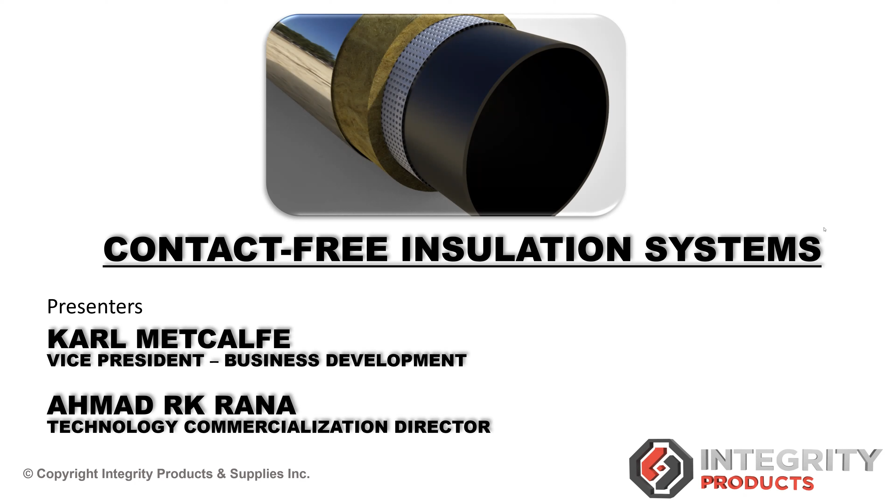We'll just do some quick introductions. My name is Karl Metcalfe. I'm VP of Business Development here at Integrity Products. I've been with Integrity Products for almost 4 years now. Degree qualified in business procurement and supply management, and I have over 18 years experience in the construction sector and the oil and gas industry. Joining me here today is my colleague Ahmad.

Ahmad, would you like to do a quick introduction? Yeah, thanks. It's almost 1 year. Speaking in terms of my education, I have a master's degree in materials and corrosion engineering. And while talking about my experience, I have almost 10 years of experience dealing with corrosion, whether in terms of my capacity as a field inspector, asset integrity, as well as R&D professional.

Thanks for that, Ahmad. So just for today's agenda, we're going to have a quick overview of corrosion under insulation and stress corrosion cracking. We want to talk about our approach to product development, of course, non-contact insulation systems, which is one of our newer products that we have developed. In relation to that, we're going to be talking about the ASTM G189 testing, which we have completed, and some of the results which we have seen. We'll do a quick overview then of our product range. We'll move then to a quick summary of our presentation here today, and then we'll leave the floor open for any questions. So any questions that you may have, you can feel free to ask them towards the end.

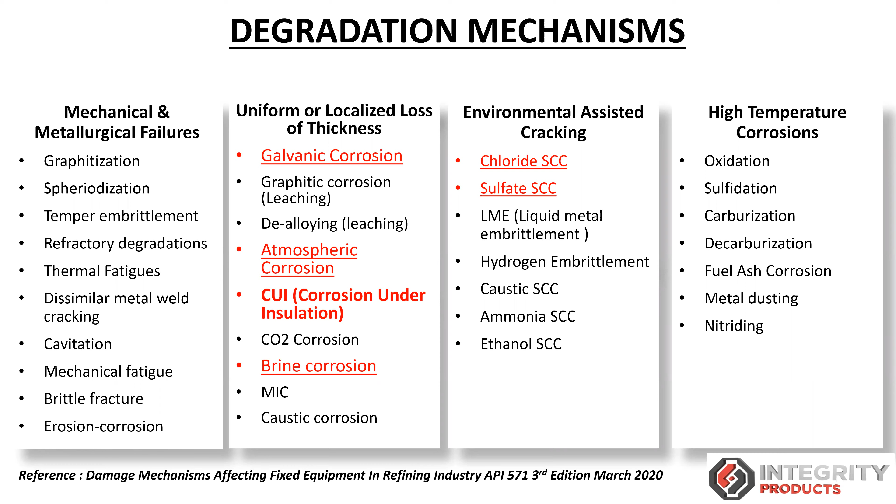And it is quite interrelated to chloride stress corrosion cracking and sulfate stress corrosion cracking. So even looking at the definition, the latest definition suggested by the API standard says external corrosion and external chloride stress corrosion cracking. Basically, both of these things, external corrosion and chloride stress corrosion cracking, are being addressed under the umbrella of CUI itself. So even though chloride stress corrosion cracking is a separate degradation, because of the failure mode of CUI, it's being included under CUI.

Speaking about CUI, it was reported as early as the 1950s, but the recommendations to address this issue came in the mid-80s and the late 90s. In the late 90s, we had the NACE SP 198 document. It was issued back in 1998, but the main focus of this document was about the coatings, protective coatings, for CUI mitigation.

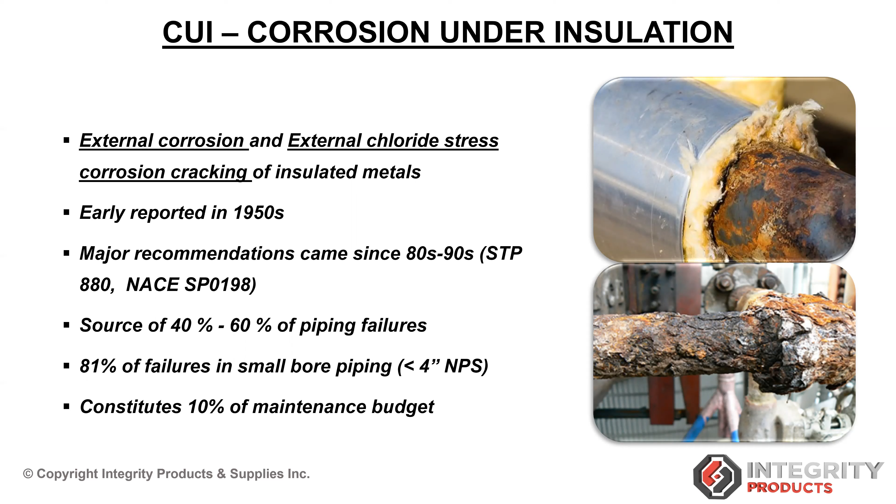When we talk about the impact of CUI, it's a widely accepted and published fact that 40 to 60% of piping failures overall are because of CUI. And if we try to narrow it down and quantify that in terms of pipe size, this impact is much higher for small size piping. With piping of 4 inches and less, 81% of the failure is because of CUI. Another case study, published by ExxonMobil, I believe in Corrosion 2003 show in San Diego, California, revealed that 10% of the maintenance budget of any hydrocarbon industry is spent dealing with CUI-related damages.

So here, as I just talked previously about the stress corrosion cracking, so it could be sulfate stress corrosion cracking or the chloride stress corrosion cracking. So again, the concept is the same, both are external to the surface of the pipe.

So as we can see in the snapshot on the left side, there are cracks, interconnected cracks, and they are originating from the points of highly corroded zones. So we can see in the snapshot.

And if we try to analyze those cracks using the microscope, we can see on the right side in the micrograph, it's a low magnification micrograph showing that these cracks are happening at the grain boundaries. So grain boundary is the location where the corrosion happens, and the same location the crack is happening. So it's a stress corrosion cracking mechanism, as I just mentioned.

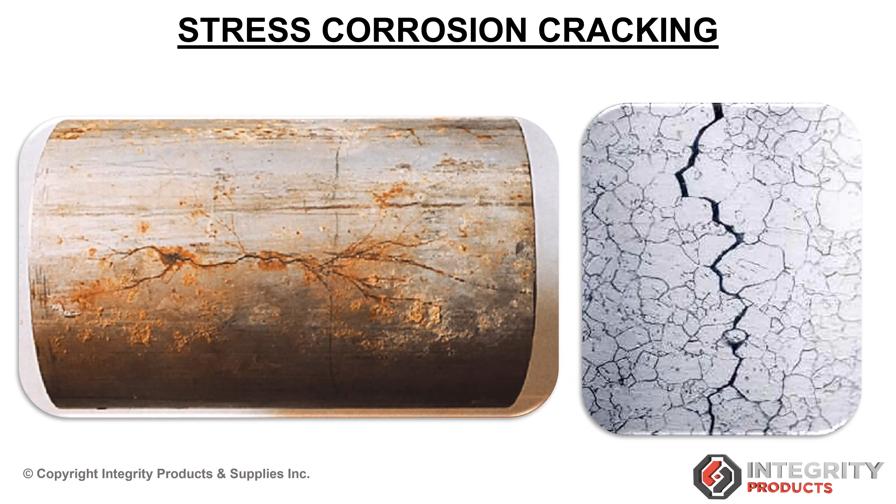So speaking about the CUI, it's a widely accepted fact that CUI is a prevalent degradation across the industry. But still there is uncertainty. It's still a gray area when we try to quantify the impact, the probability, or the consequence of CUI.

So even the modern recommended practice for the semi-quantitative analysis of CUI that is most widely used takes into consideration the design factors for calculation of CUI. So those design factors could be even the material composition itself, the base corrosion rate of the material, and also it takes into consideration the geometrical factors, the interface of piping and the pressure vessel or the storage tank itself, or it could take into various complexity factors.

And also it takes into consideration the insulation factors. That could be the type of insulation, whether we are using calcium silicate, mineral wool insulation, or foam glass, and the impact of the type, as well as the age or the condition of insulation, and also the surroundings that have a decisive impact towards CUI.

So when we speak about the surroundings, it's an external environment, and also the neighborhood factors. External environment could be the proximity to the marine location, or it could be cooling tower drifts itself, or the water spillage from leaking lines, or from any neighborhood maintenance activity like hydrojetting or hydroblasting activities. So these are all the factors that actually contribute to the CUI probability.

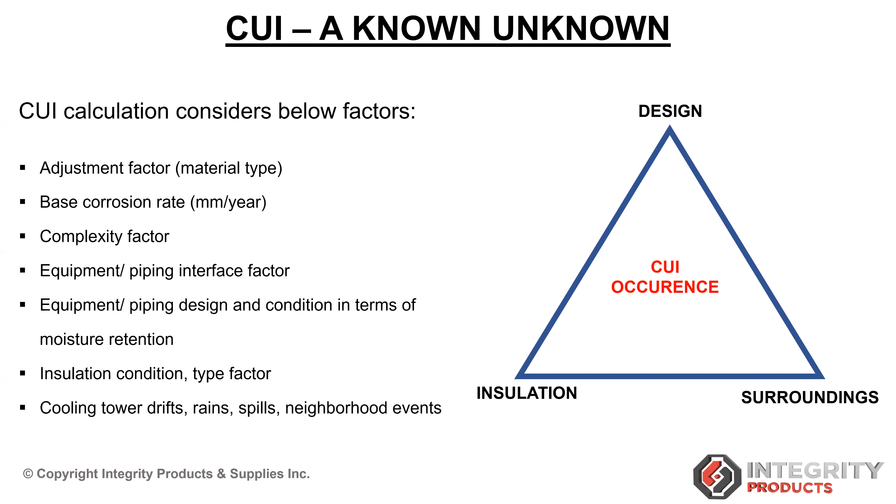Just to talk about our approach towards our product development, I think it starts either by seeing firsthand problems that our clients are experiencing in the field, or a lot of time it's from just making ourselves familiar with some of the published research that's out there, and also kind of the standards that have been displayed across the industry. So from there we look to design and start to prototype product ideas.

We have capabilities of doing our own in-house technical drawings, and we've got 3D printers. So from that we can very easily visualize and get our first product prototype in our hands. Usually from there we're looking at doing our own in-house shop testing. But at the earliest stage, we're looking to actually push that out to larger scale field trials.

Then once we compile that information and we see how the product has done in a field installed condition for a number of months or whatever it may be, we look to do final validation on the product, any sort of refinements we wish to make. And we then usually try to push towards doing some third-party independent testing. And then we approach our goal of having a finished, ready for market product.

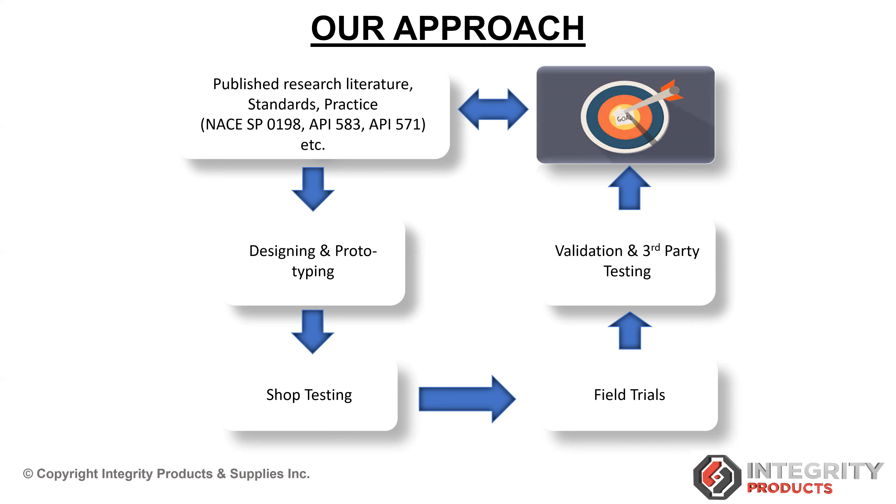Our mindset towards approaching the CUI problem has been that there's no one silver bullet which is going to solve the problem, but it absolutely starts at the design stage. If the designers are considering CUI and other degradations right from the design stage, then they will build better systems.

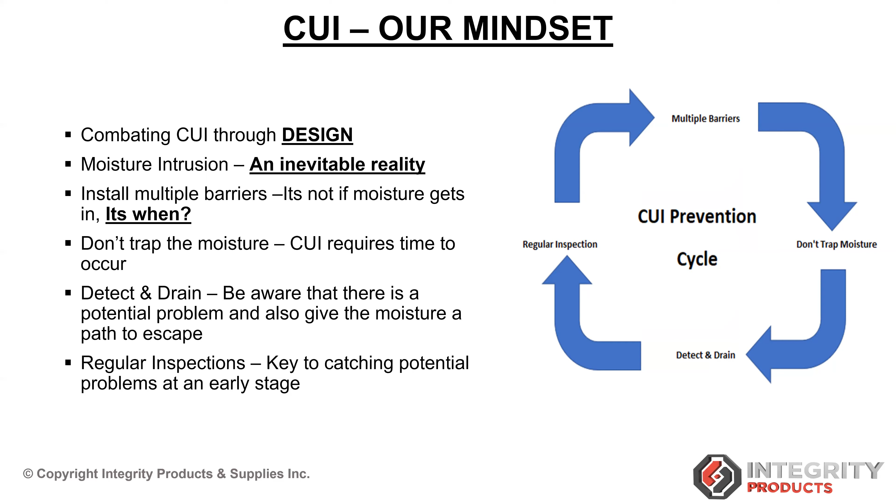But we believe it's very much so kind of multiple barriers, with pipe coatings, good insulation selection, auxiliary products as they're required, and then of course not to trap the moisture, to be able to detect and drain it. And then of course regular inspections are key for catching any potential problems at an early stage.

Thanks, Karl, for that info. So speaking about the contact-free system, that is actually the theme of this presentation.

Looking at the API standard and NACE SP198, they are in consensus about contact-free systems. API 583 suggests that contact-free insulation systems prevent water accumulation and chloride build-up on the steel surface. So basically, even if the insulation is soaked or saturated with moisture, we should have a provision that keeps it away from the pipe itself.

NACE SP198 actually cracks a myth by declaring that the cause of CUI is not the insulation, rather it's aerated moisture, or water containing CO2, oxygen, and other dissolved gases. So by having a contact-free system that keeps the aerated moisture away from the pipe, that would be an effective mitigation for CUI.

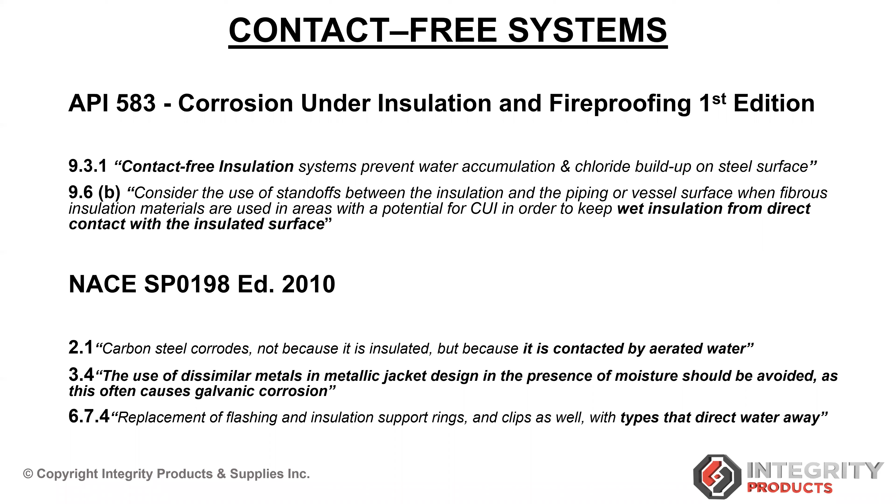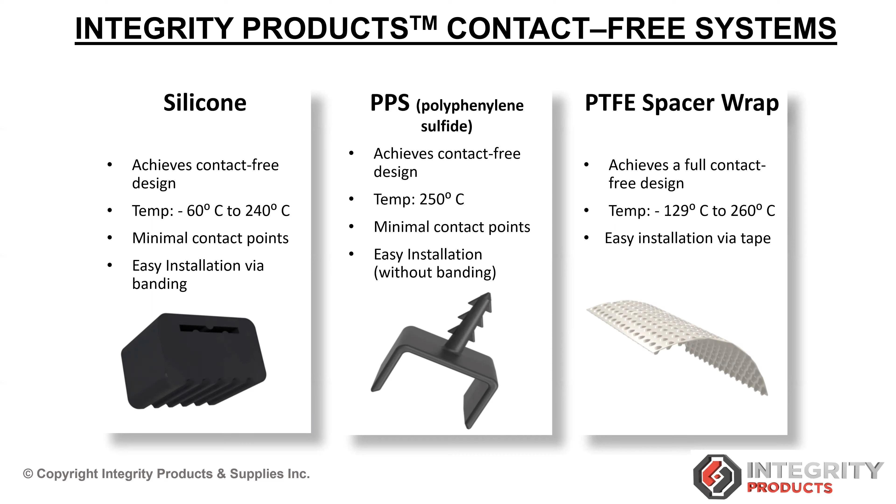Leading from there, we've developed a few different systems for creating a contact-free insulation system. We have our silicone blocks, which are installed via banding - they strap directly to the pipe, and the insulation is oversized and placed over them. We also have our PPS spacers, which simply stab into the insulation for a very easy install - stab directly into the insulation, then place it over the pipe. They work very well. Our latest product is the PTFE spacer wrap, a full wrap installed directly onto the pipe before insulation is installed.

Here are a few images showing how that's done. In the top left, you can see our silicone blocks have a slot built through them, so you can easily install them with a band, and the insulation can go straight over top. The polyphenylene sulfide spacers have that spike on them, which lets you stab it directly into the insulation, and then the insulation is placed onto the pipe. With both of these, we've tried to minimize the actual contact points between the device and the pipe itself.

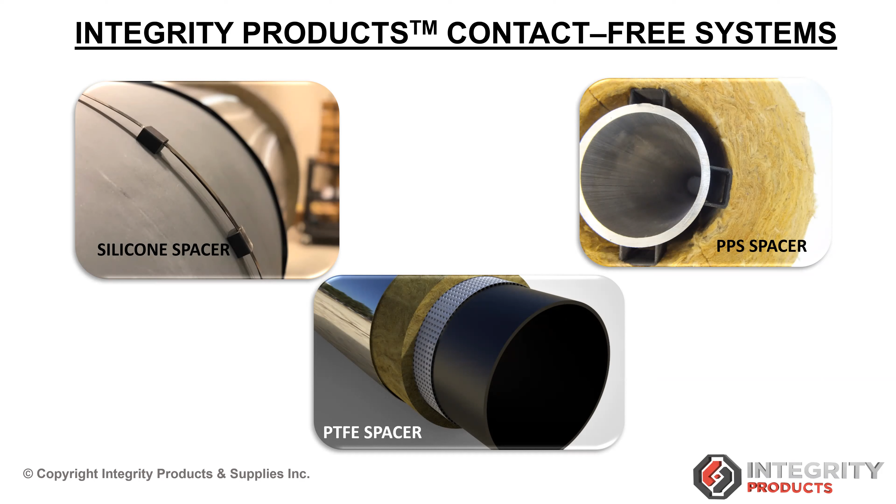Our PTFE spacer wrap is a fully encompassing wrap, placed on the pipe prior to insulation being installed. It's installed with the dimple side down, creating a 6 millimeter gap between the pipe surface and the insulation. We recommend the longitudinal joint just be a butt joint - there's no need for an overlap at the 6 o'clock position. For a circumferential joint, we recommend a 2-inch or 2 dimple overlap.

We also recommend the use of non-metallic strapping or tape to install it - our recommendation is 3M 69 tape, which is a high temperature tape. Here's a nice visual showing it clearly: we've got the PTFE spacer wrap placed directly onto the pipe, then the insulation going over top of it, and finally the metal cladding on the outside.

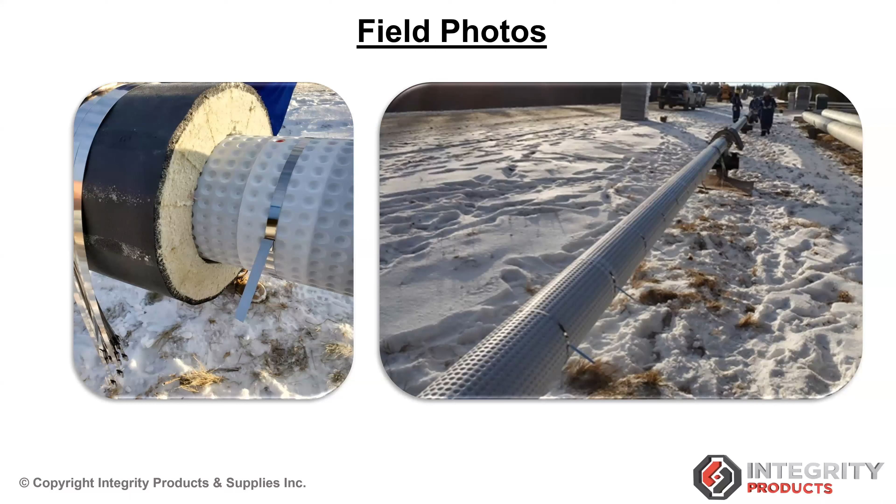Just a couple of field photos from a recent project we're working on. In this scenario, the contractor used metal strapping, but that's not something we recommend, due to the potential to poke a hole in the PTFE spacer wrap itself. You can see it's placed on the pipe, overlapped, and the insulation is then placed over top of it. We were very happy to get this product onto our first project and get some nice field shots of it being installed.

Thanks, Carl. I'd like to share some findings from our testing project recently completed in collaboration with National Research Council Canada. The aim of this testing was to check the CUI performance of different types of insulation and different configurations of insulation systems in conjunction with spacers and low point drains. All testing was conducted per ASTM G189 standard by a third competent party.

And here is the experimental setup showing the arrangement. For this testing, we used carbon steel. Uncoated carbon steel was used as a test coupon. On this end, it was covered with insulation and jacketing. And on the top side, we can see there is a funnel meant to introduce the electrolyte into the cell.

On the right side, we can see an immersion heater. The aim is to increase the temperature of the cell up to 100 degrees Celsius. The reason we are using 100 degrees Celsius is that it's the most favorable range for CUI.

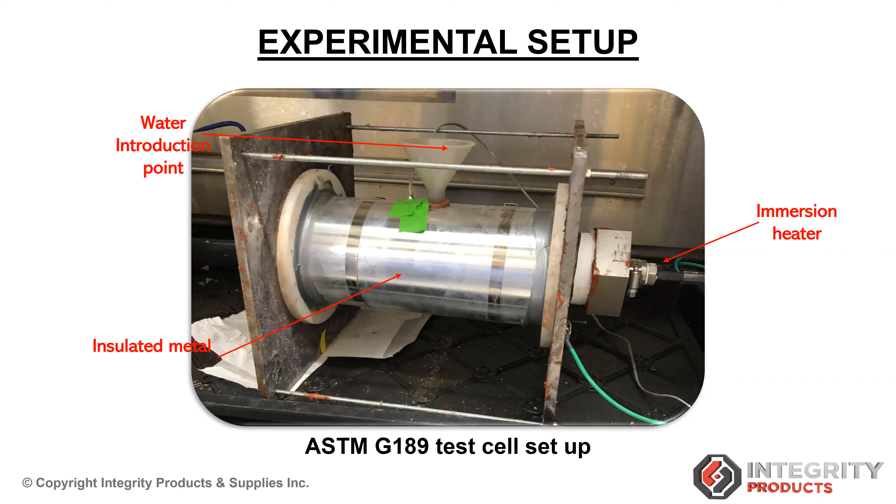So for the first phase, this project was actually divided into two phases. As part of the first phase, we checked mineral wool insulation as well as hydrophobic blankets in terms of CUI performance. That was phase one, and we also tried to check the performance of mineral wool insulation in the presence of the PTFE spacer wrap.

Speaking in terms of experimental results, these are the snapshots of the corroded coupon samples. On the left side, we can see the original sample before the corrosion test started, containing a grit 600 finish. The next sample was held directly in contact with the mineral wool. The third one was directly in contact with the hydrophobic blanket.

And the last one was wrapped with mineral wool insulation, but the contact-free system was achieved using the PTFE spacer wrap. Something to observe is that in the last sample on the right side, there is no corrosion at all on the surface. Rather, there is a change of color because of high temperature oxidation on the surface of the metal. So there was no pitting or general corrosion in the presence of the PTFE wrap.

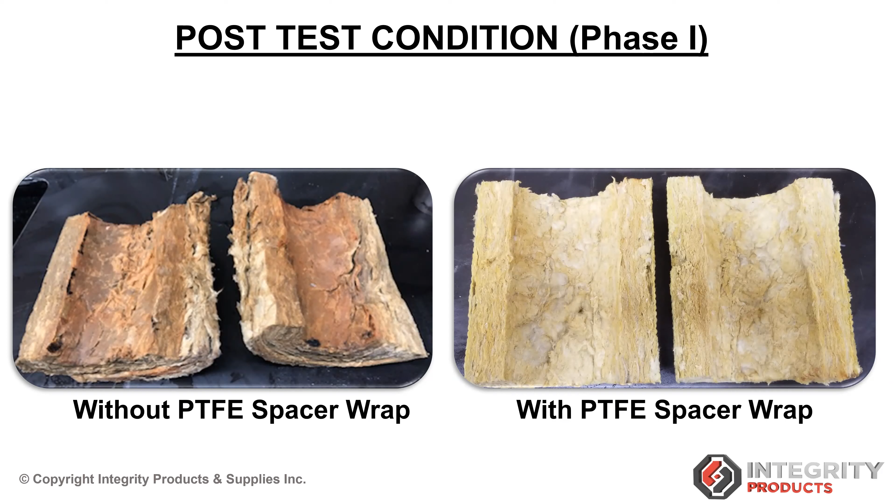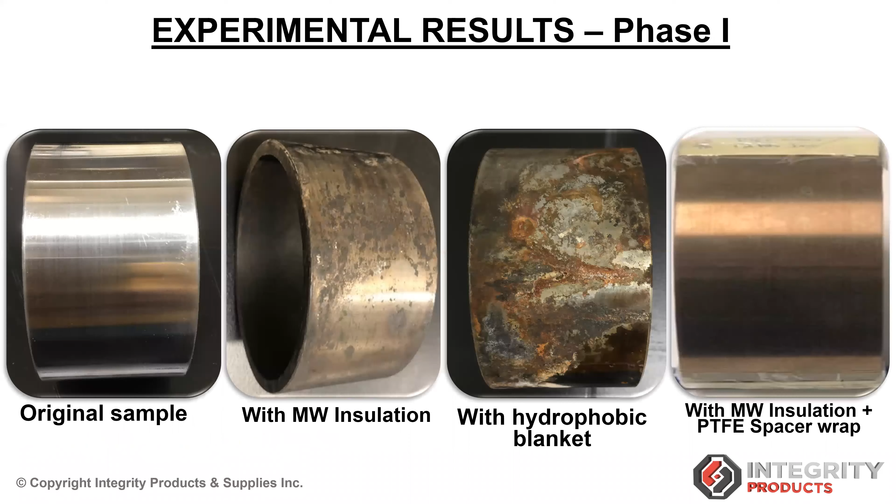I would just take the opportunity to mention the test conditions. Testing was conducted at a constant temperature of 100 degrees Celsius for a duration of 72 hours. So after 72 hours, this is the condition of the insulation.

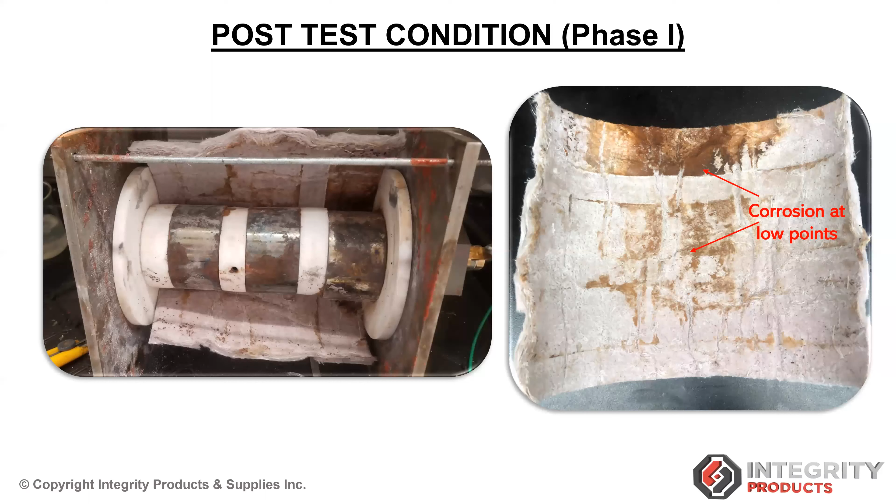Speaking in terms of hydrophobic insulation, that was also held directly in contact with the pipe, and it behaved in almost the same way. We can clearly see the stains of corrosion from the coupons at the 6 o'clock position of the insulation.

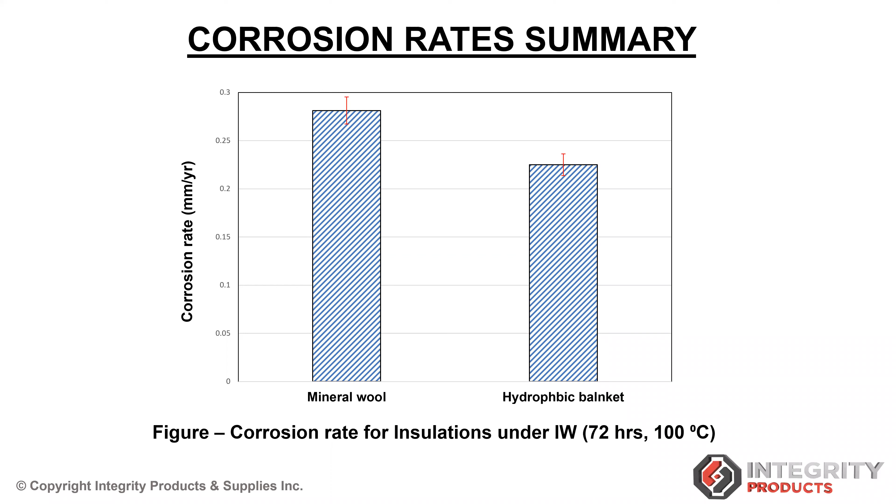Here is the summary of the corrosion rates we calculated for the corroded samples using the mass loss data. We can see from these histograms that mineral wool had a slightly higher corrosion rate, very close to each other, but slightly higher than the sample directly in contact with the hydrophobic blanket. Only the sample protected by the PTFE wrap never showed any signs of pitting, general corrosion, or any signs of stress corrosion cracking on the surface.

As part of phase 2 of this testing project, we used 3 different configurations, and every configuration was made using mineral wool insulation. The first configuration was mineral wool insulation directly in contact with the pipe. The second configuration, we created a contact-free system using PPS spacer, polyphenylene sulfide spacers, to create a 16 millimeter gap between the inside of the insulation and the outer skin of the pipe.

With that contact-free insulation, at the 6 o'clock position we installed the low point drains, or the integrity drain plug, one of our products. We installed that at the 6 o'clock position. That was the second arrangement.

And the third arrangement we made for phase 2 of the testing was mineral wool insulation directly in contact with the pipe, and at the 6 o'clock position, we drilled the drain hole.

So here we can see in this figure, the drain hole looks a bit weird because it's misaligned. When we say low point drain hole, it's a combination of the hole in the jacketing and the hole in the insulation. When these holes are concentric, or aligned to each other, it's a perfect hole. But even with pipe vibrations, thermal expansion, mechanical loading, or someone sitting on the pipe, there's a likely chance these holes can misalign from each other.

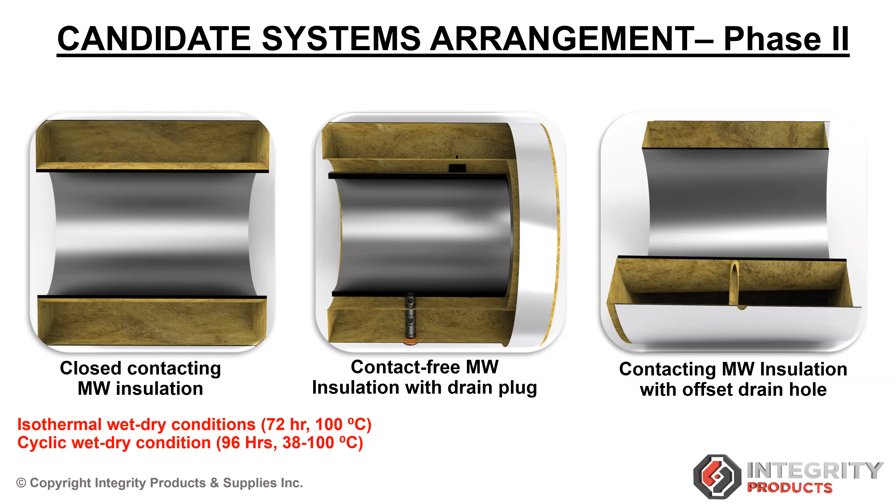Each of these configurations was tested against two conditions. There were six tests done in phase 2 of the project. One was isothermal wet and dry condition, meaning constant temperature, where we created wet and dry conditions for 72 hours. The other was cyclic, or fluctuating temperature between 38 and 100 degrees Celsius, for a duration of 96 hours, or 4 days of continuous testing.

From this testing we got the mass loss data and converted that into corrosion rate using the applicable ASTM standards. Here is the summary of the corrosion rates for all these configurations.

We can see that the middle two histograms, the contact-free system achieved using the polyphenylene sulfide and the drain plug, have a much lower corrosion rate than the rest of the candidate systems. The reason is that the contact-free system is delaying the degradation on the other side, while the low point drain is quickly draining the electrolyte from the system.

It's interesting that there's virtually no difference between the closed contacting system and the system with a drain hole. Once that drain hole becomes offset between the hole in the insulation and the hole in the cladding, or it collapses or gets clogged somehow, it shows very little difference. You might as well not have a drain hole at that point. Either we have to re-drill the drain hole, or find some mechanical device, like drain plugs, that keeps it robust and operating, and keeps that cavity clear.

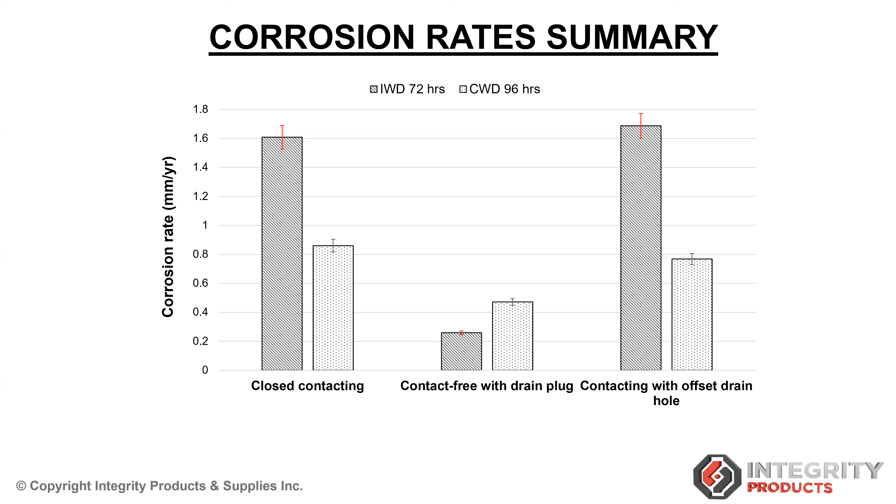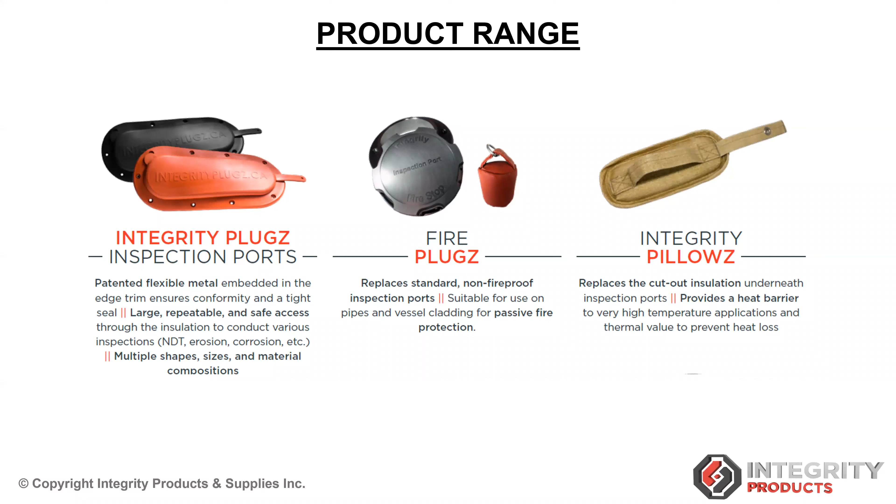We also have a similar product called our fire plugs, a fire-rated inspection port. We have our integrity pillows, which work in conjunction with our integrity plugs, replacing the cutout insulation piece. We make them from a high-temperature vermiculite fabric, so if you've got a very high process temperature, these act as a heat shield for the inspection port itself.

We also have our integrity water indicators. These are again a simple device similar to our drain plugs, except they have a small hydrophilic elastomer ball built into the housing of the device, and when that comes in contact with flowing water, it just pushes out this orange notification.

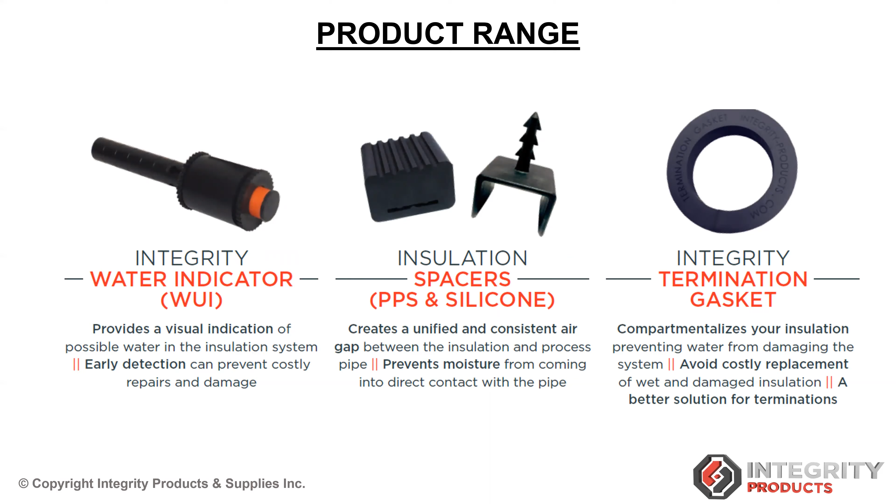As mentioned earlier, we've got our silicone and polyphenylene sulfide insulation spacers. We also have our integrity termination gaskets, which form a watertight seal at any point where you're looking to terminate the insulation. We make these for every pipe size and every insulation thickness, and they've been a key part of our product lineup in recent years.

As discussed in some of our testing, we have our integrity drain plugs, a simple device made from polyphenylene sulfide, so incredibly durable, hard wearing, and high temperature resistant. These install up through the metal cladding and through the insulation. They have a serrated cutter head which allows you to core out the insulation piece for install. You can see breakaway points along the neck of the device, so you can snap them off by hand to suit your insulation thickness.

We also have integrity clamp covers, created to form a watertight seal around penetrations from Grinnell clamps on the piping. Traditionally, contractors would build a metal box or try to seal around the clamp with silicone, usually a difficult piece of work, but we've created these integrity clamp covers. We have them in various different sizes to suit many different applications.

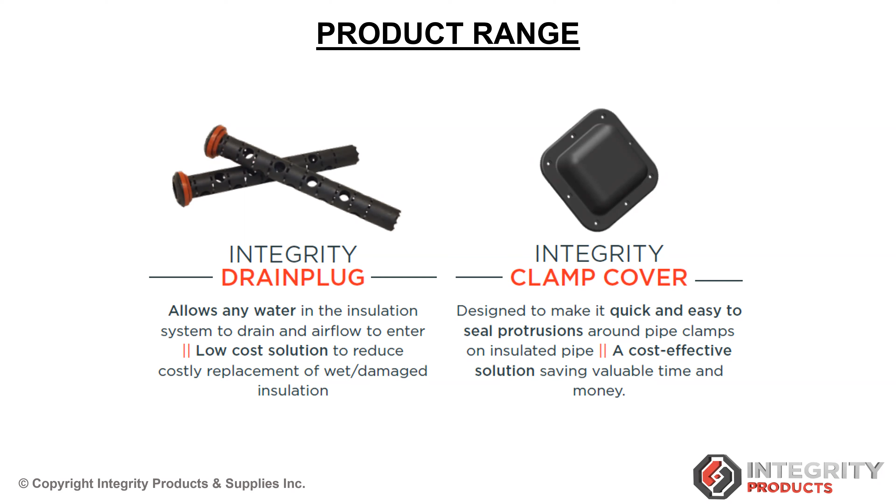This product is very new. We're still conducting field trials with a major asset owner here in Alberta, which has been fantastic, but there'll certainly be more to come on this over the coming weeks.

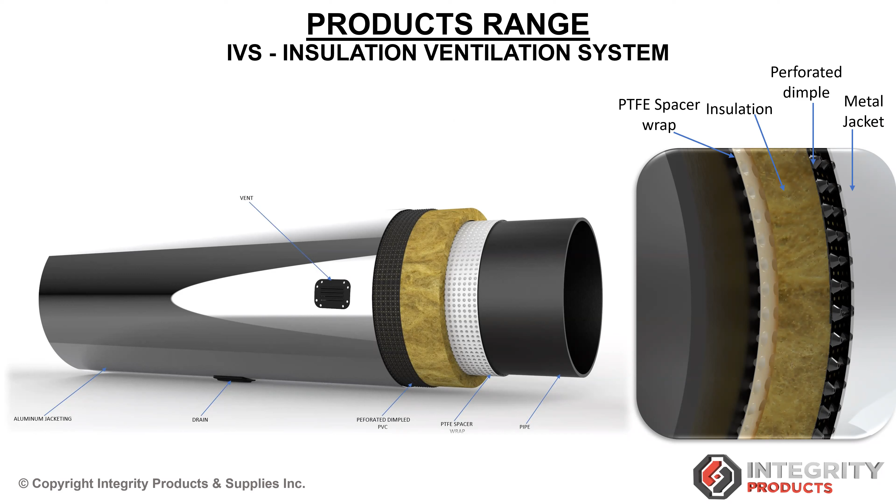So just to summarize what we've gone through: we had a look at CUI and the related degradations, we talked about contact-free insulation systems and our PTFE spacer wrap, we took a quick look at the ASTM G189 testing we conducted and some of the results we've seen from that, and we also did a quick overview of the rest of our product range.